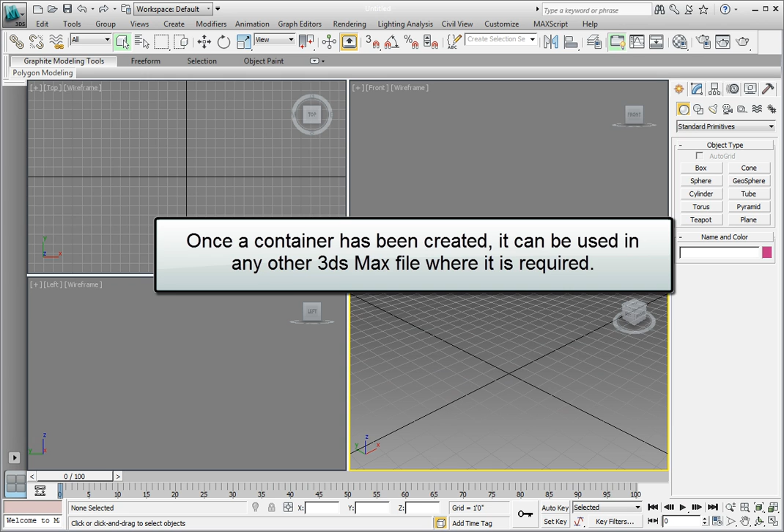Once a container has been created, it can be used in any other 3ds Max file where it's required. Let's add a container, then inherit the rocking chair so that we can use it in a scene.

From the Quick Access toolbar, click Open. From the Chapter 3 subdirectory of the Scenes folder, open the file Chapter 3 containers01.max. This is a simple scene of the front facade of the house that has a nice front porch where we can place the rocking chairs.

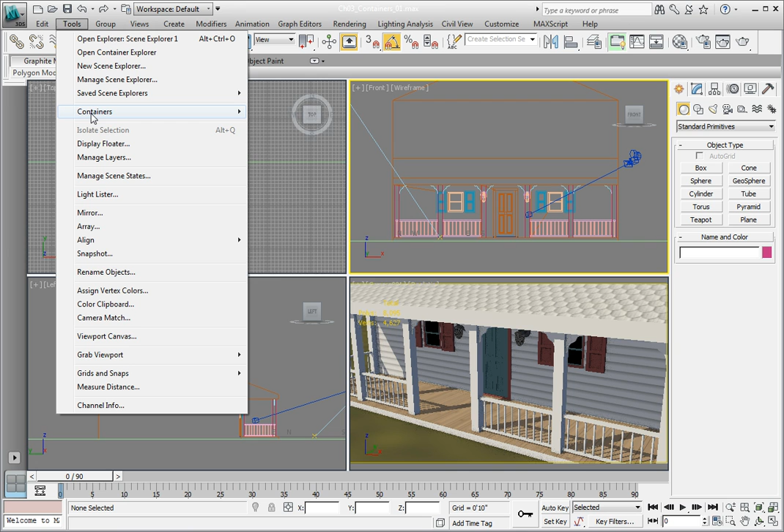To inherit a container, we have two options. The first is to go to the Tools menu, then click Containers, Inherit Container. This will open the Inherit Container dialog. Navigate to the Chapter 3 subdirectory and double-click on the Chapter 3 Rocking Chair 01 Con Rocker Max C file to bring the file into the scene.

Using this method, the rocking chair container object comes into 3ds Max where it was created. Also notice that the container is open. An open container allows us to edit its contents if we choose.

Now we need to move it to the correct location. Activate the Select and Move tool by pressing W. Make sure the con_rocker object is the only object selected. In the top viewport, click and drag the rocking chair container to the left side of the front porch. This will move the container and all the objects associated with it.

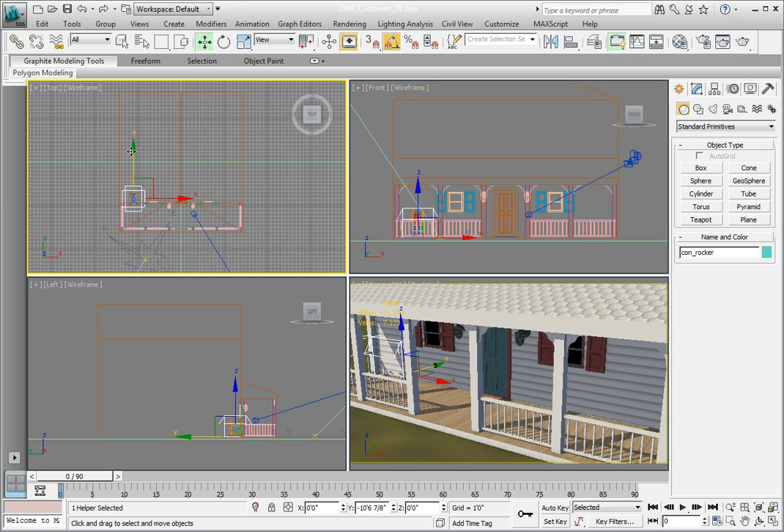Now let's create a container another way. Click on the Create tab in the Command panel, then click on the Helpers option. Before we move forward, let's maximize the top viewport. Activate it, then click the Maximize Viewport toggle in the lower right.

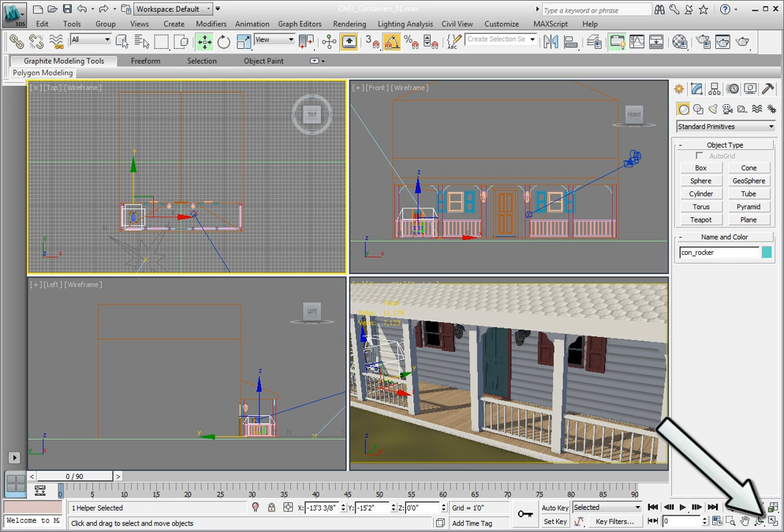In the Helpers Object Type Rollout, click on the Container button. Click and drag a container object just to the right of the rocking chair we inherited before. Make this about the same size as the other container object.

Now change to the Modify panel. In the Manage Container Rollout, click on the Inherit Content button. Now in the Inherit Container dialog, navigate to the Chapter 3 subdirectory and double-click on the Chapter 3 Rocking Chair 01 Con Rocker Max C file.

This inherits the container's contents into a newly created container object. Notice that both containers are open. That's because the rules allow this container to be edited with all parameters unlocked.

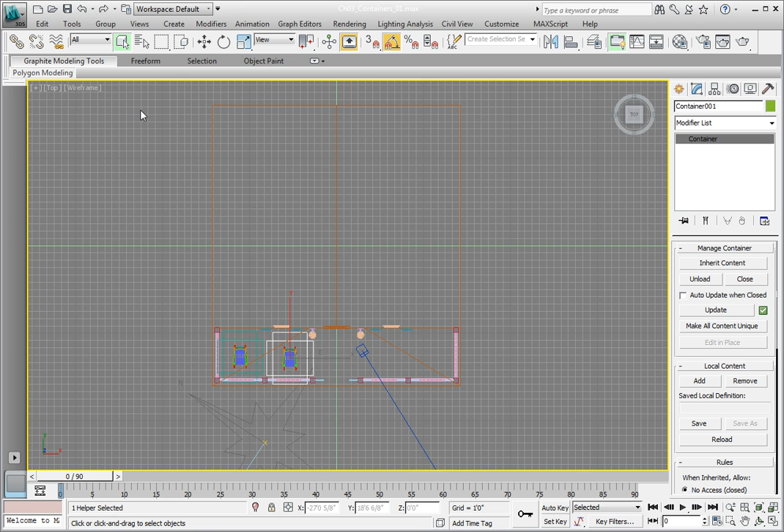To close the container, click the Close button. This opens the Container Definition File dialog again and is asking you to save the file. The file name defaults to the 3ds Max file name plus the container object name. In this case, it's Chapter 3 Containers 01 Container 001.

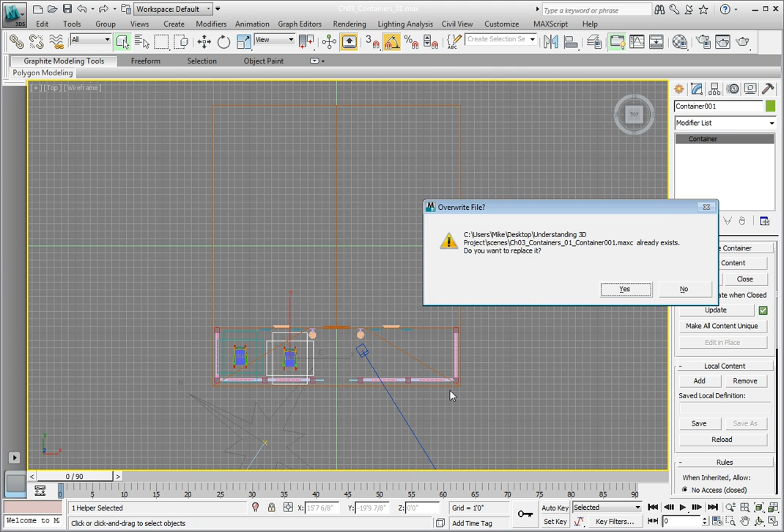Click Save, then click the Maximize Viewport toggle to return to a 4-viewport layout. Notice that the new container is now closed and we can only click on the container object itself, not the parts of the rocking chair individually.

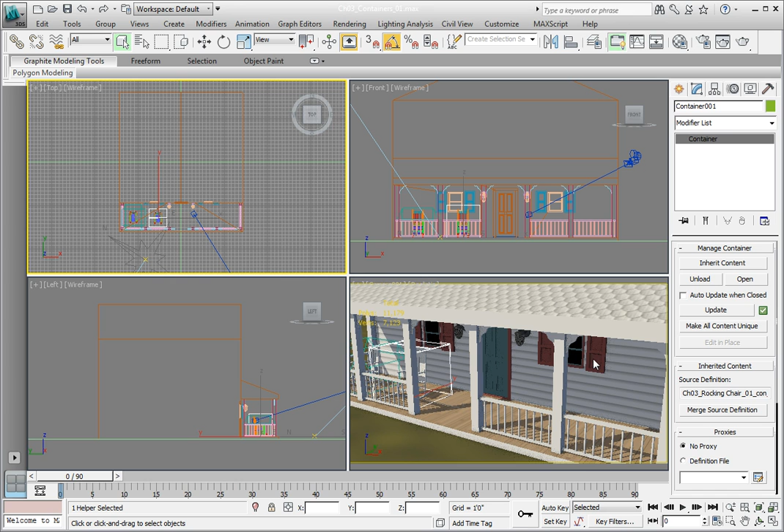Before we finish this scene, let's make an array of the closed rocker container. Make sure the Container 001 object is selected. From the Tools menu, choose the Array option to open the Modeless Array dialog. The Array dialog has been modified and is now a modeless floating dialog that can remain open while you work.

First, we want to set the X value in the incremental Move option to 7 feet 0 inches. Make sure the type of object is set to Instance, although this option really doesn't matter because all the containers will be using the same inherited file. And if the original file changes, all the containers using that file will update.

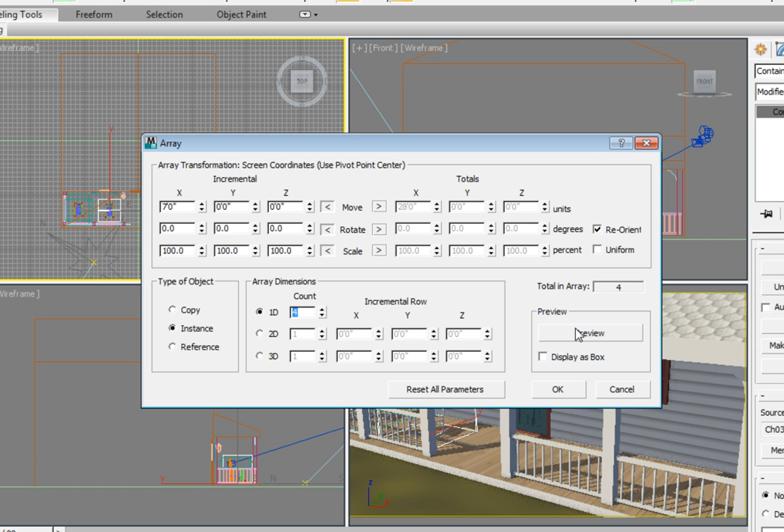In the Array Dimensions area, set the 1D count to a value of 4. In order to see the current array, click on the Preview button in the Preview area. You will then see 3 additional objects. Click OK to accept the array parameters and create the new rocking chairs.

Let's delete the one in front of the door. Select the middle container, then press Delete to remove it from the scene. Now that the containers are in the scene, if we edit one of them, they will all update.

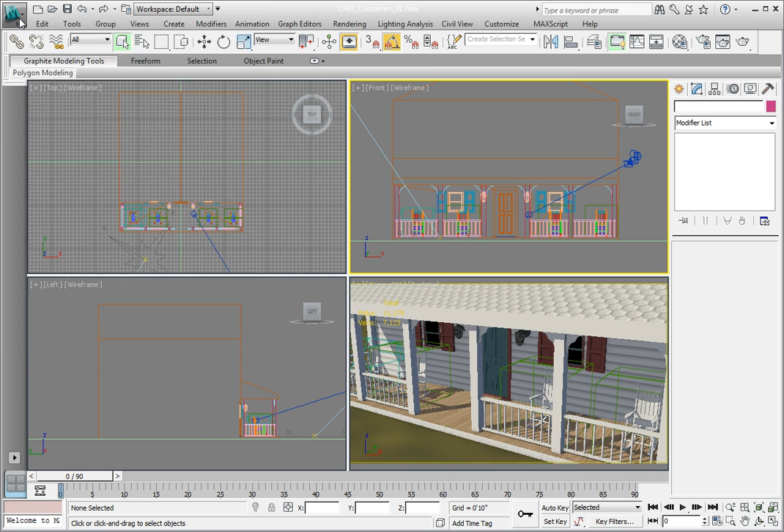From the Application menu, click Save As. Click Increment on Save to increment the file name and save the file.